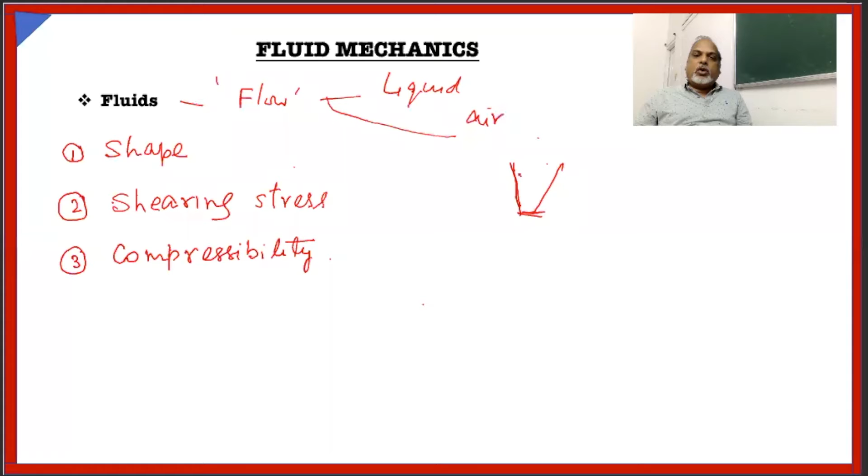Now we will discuss fluids based on their shape, shearing stress, and compressibility. As you know, solids have a definite shape, but fluids acquire the shape of the container. This is true in the case of liquids. Suppose you pour water into a glass; then the liquid will acquire the shape of the glass. So fluids generally don't have a definite shape.

Then what about shearing stress? We have seen in the case of solids, suppose you have a solid block like this. If you apply a force here, this is called longitudinal force, and this area, suppose this is A, then F upon A will be your longitudinal stress.

But solids can withstand horizontal force also. If you apply the force like this, it is called shearing force. They can withstand shearing stress. But in the case of liquids, you cannot apply any horizontal force. They cannot withstand any horizontal force. So there is no question of withstanding shearing stress.

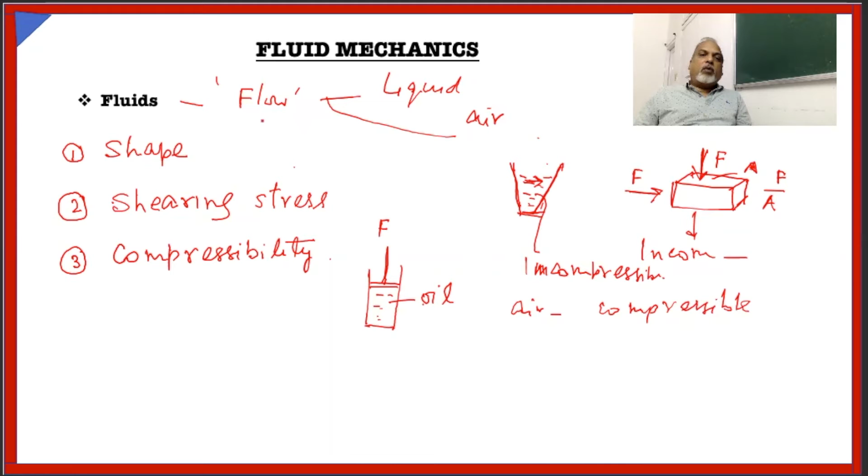Now let us see what density is. Density is denoted by rho. It is the ratio of mass upon volume. But here, one important fact is there: this mass should be uniformly distributed.

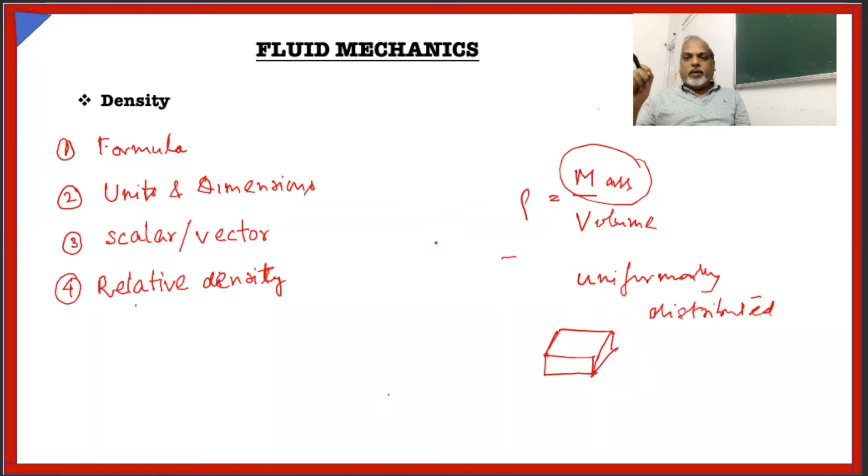Suppose you have a block. If it is a solid block, you can measure its mass and its volume. This will give you the density correctly. But suppose that block has some cavity inside; then the mass will be less, but it will have the same volume by dimensions if you measure. So in that case, the measurement of density will be wrong. You have error. So please note that mass should be uniformly distributed throughout.

In the case of liquids also, the same thing is there. Suppose this is the liquid. If you measure its mass and volume, then you can find out the density.

What is the unit of density? Density is mass upon volume. That means it is kg per meter cube. This is the unit of density. And what about its dimensions? Dimensions are M L^-3; these are the dimensions of density. Now, is density a vector quantity or scalar quantity? Of course, mass is a scalar, volume is a scalar, so it's a scalar quantity.

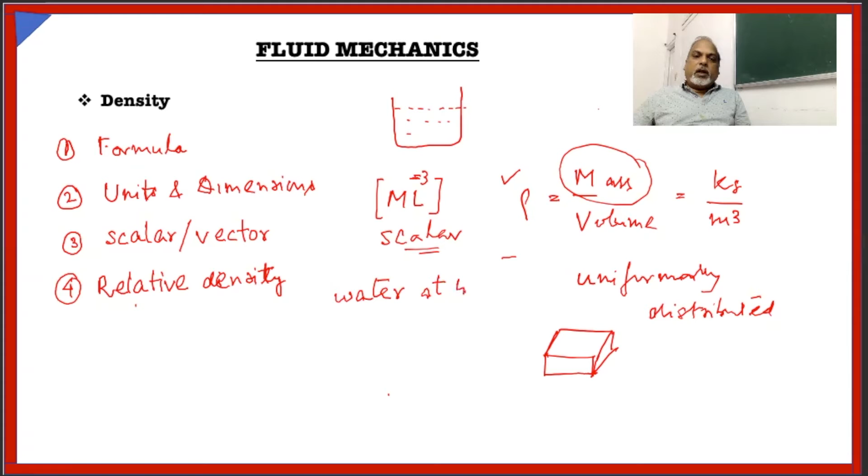Now, in the case of water, at 4 degrees centigrade, the density of water is 1000 kg per meter cube.

Now, what about relative density? Relative density is the ratio of the density of any substance with respect to the density of water. Like, the density of iron is about 7800 kg per meter cube, so the relative density of iron will be 7.8. So relative density is basically dimensionless. Correct?

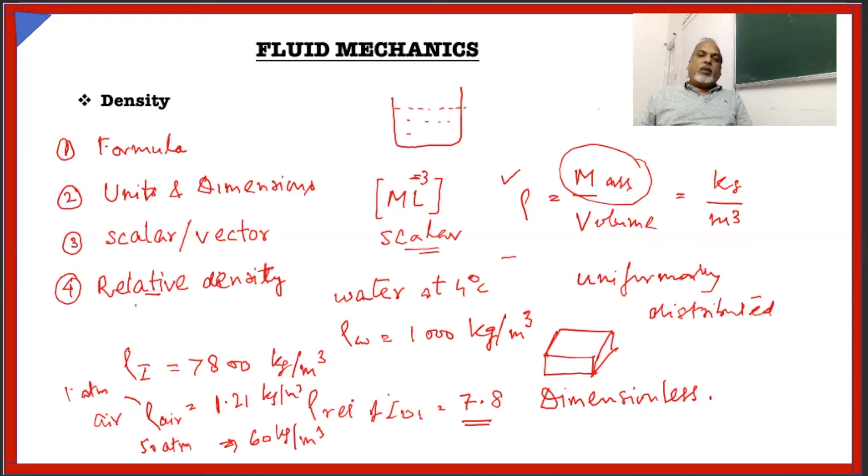But if you apply a pressure of 50 atmospheres, compared to this at 1 atmosphere, then this goes up to 60 kg per meter cube. I wanted to show you that air is a compressible fluid. Its density changes with pressure. So I hope the concept of density is clear to you.

Now we will talk about pressure, which is very important. What do you mean by pressure? We have seen in the case of solids, suppose you apply a force like this, and this is the area, then F by A is called longitudinal stress.

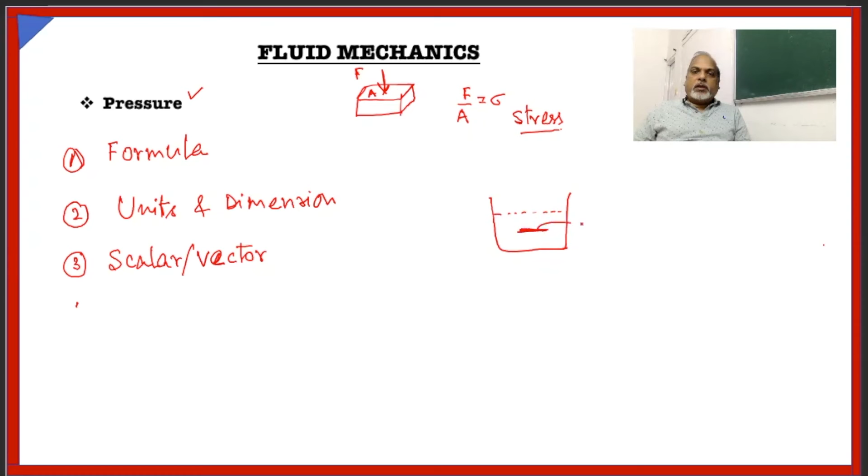But in the case of liquids, suppose you have an object like this, whose area is A, and if this force is F, then F by A is called pressure at this point, or on the face of that object.

Now, pressure has its own property. Like, if you have liquid here, and you have a point here, then this pressure P will be the same from all directions.

How is this pressure coming onto this? Suppose you have an object like this. Naturally, this pressure is coming. Suppose you have this water column above this face. So the pressure is coming due to the weight of this water column. Correct? And one more thing: pressure is always normal to the surface.

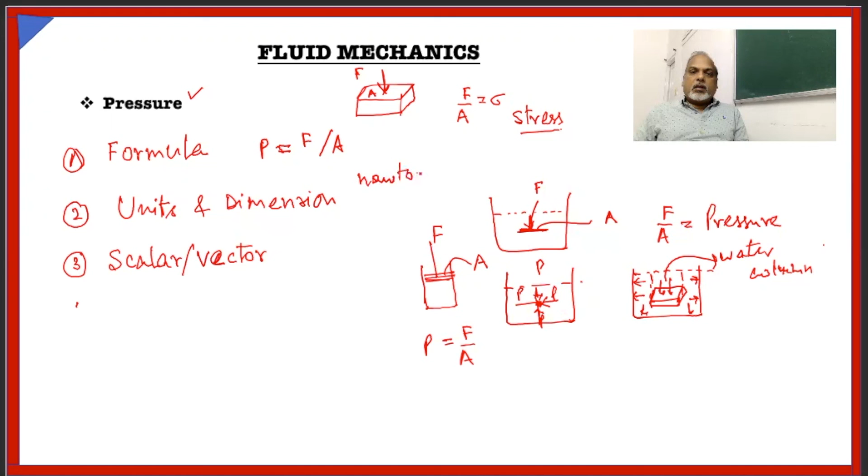Naturally, its unit will be newton per meter square. This is the SI unit. And this newton per meter square is also called pascal. It is named after the French scientist Blaise Pascal. In the next video, we are going to see what Pascal's principle is.

So that's the unit, and what about its dimension? You can find it out: newton is M L T^-2, upon area. Area is L squared. So this will give you M L^-1 T^-2.